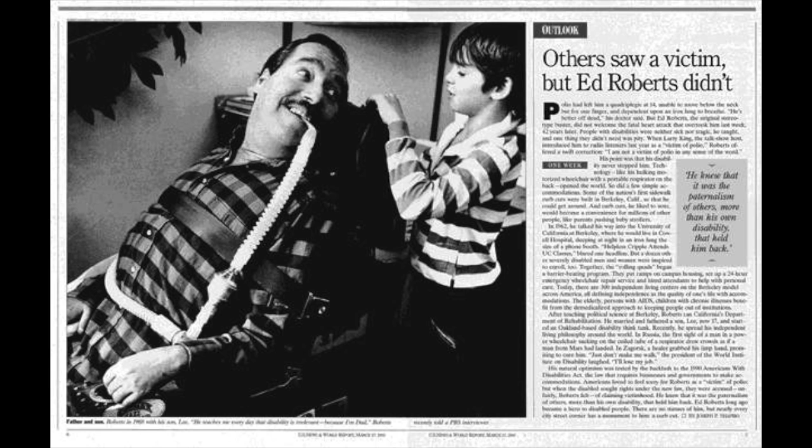It may surprise you that only 30 years ago, many of the buildings where you visit or work were completely inaccessible to people with disabilities. With a great deal of effort and commitment, people with disabilities organized and forced America to pay attention to building access. Since first signed into law in 1990, the Americans with Disabilities Act has made sweeping changes to American buildings, structures, and accessways. There are a stunning number of details in the ADA and its revisions.

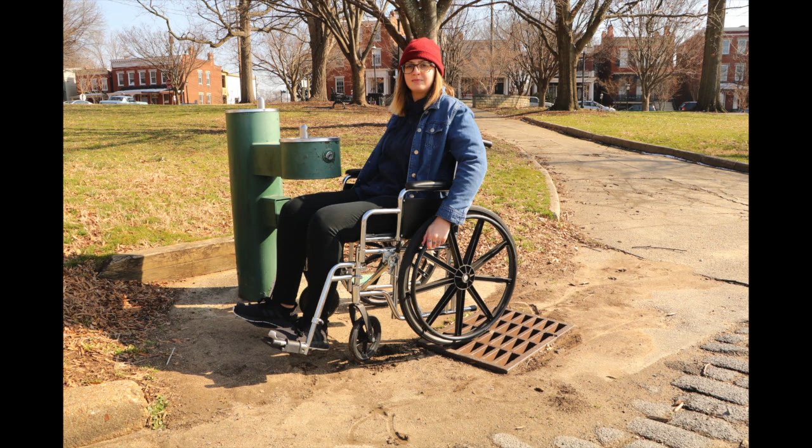Feel free to look through all of the requirements at the website www.access-board.gov. We would like to show you some of the basic parts of the ADA that you may see in your own day-to-day journey through life. Remember that the ADA is an important part of the legacy and history of people with disabilities.

There are 4 main areas called building blocks that the ADA uses as a basic guide. 1. Floor and ground surfaces. 2. Ground space or turning space. 3. Operable parts. 4. Protruding objects. In our tour of the ADA, we will address each of these building blocks.

Today, almost all government-owned or public buildings are ADA compliant, which means they are accessible to most people with mobility, vision, or hearing disabilities. Most aspects of the entrances, exits, and interiors meet guidelines that allow people to navigate. Let's start with the first area you will encounter when visiting a public building, the parking lot. There will be a specified number of parking spots and van spaces for people with disabilities. The number of those spaces depends on the total spaces allocated for that building.

For example, if there are 100 to 150 total parking spaces, the law requires allocation of 5 standard accessible spots and 1 van accessible spot for people with disabilities. The surface must be concrete or asphalt. There must also be a clear access route and signs indicating parking spots and signs to the door or entrance you will use. The surface must be hard and free of debris or deterioration.

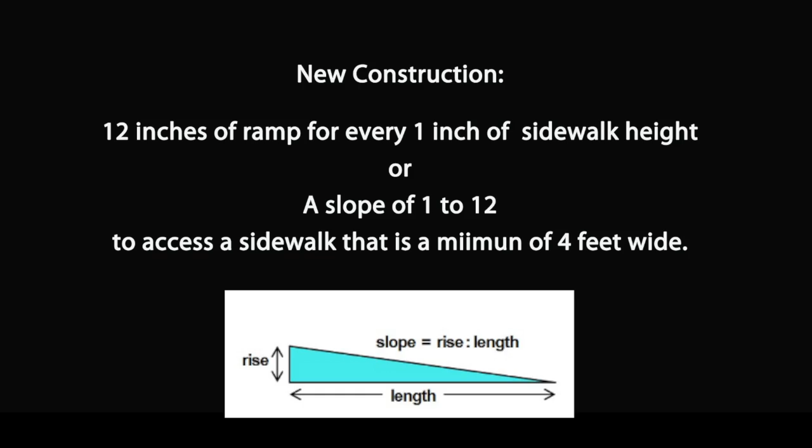Curb cuts and curb ramps that bring a person from street level to sidewalk level come in a variety of shapes and sizes. The requirement for new construction is a ramp that is 12 inches long for every 1 inch rise in sidewalk height, or a slope of 1 to 12, accessing a sidewalk that is a minimum of 4 feet wide. In your personal travels, you will undoubtedly come across curb cuts that do not meet the 1 to 12 slope requirement. These may be older buildings and sidewalks, and the curb cut is an add-on. They may be steep and difficult to negotiate.

Let's go in. At many buildings these days, access is pretty straightforward. At the main entrance, you push the blue panel and voila, the door opens. At times, you may not be using the main entrance. You might be going to a security area for clearance or to a historical building with a side entrance and a manually opening door. In an industrial or commercial setting, there must be signs indicating where you enter. There has to be a ramp to the door if it is elevated in any way. The door has to have a handle, not a knob, and the door has to open with a mere 5 pounds of force, which is very easy.

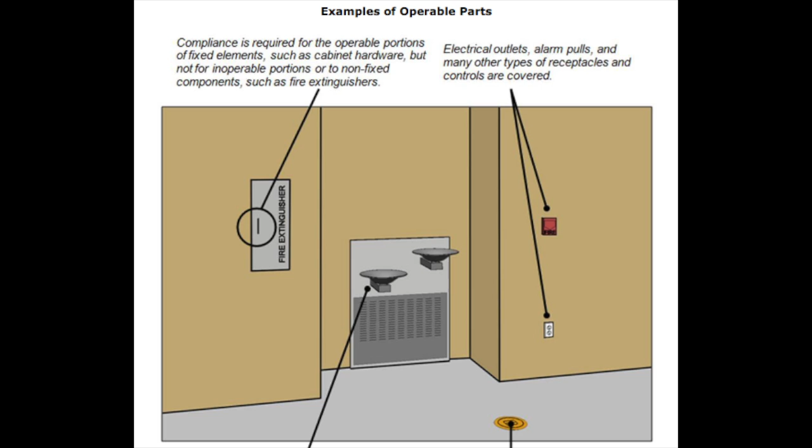The handle, instead of a knob, is one of the operable parts requirements. Other operable parts that you will see that have specific requirements under the ADA are electrical outlets, sink faucets, alarm pulls, fire extinguishers, and drinking fountains. The door handle can be no higher than 48 inches and no lower than 34 inches.

As you would expect and hope, the floor has to be hard and smooth, with plenty of room to maneuver. This maneuvering room is called turning space. Turning space is one of the critical building blocks of the ADA. It means that whenever you approach any area, there will be enough area to turn a wheelchair and maneuver effectively. The minimum dimensions for turning space are 30 inches by 48 inches. You made it inside. Good job. Here, we like to see smooth floors, plenty of light, no protruding obstacles, and plenty of room to maneuver.

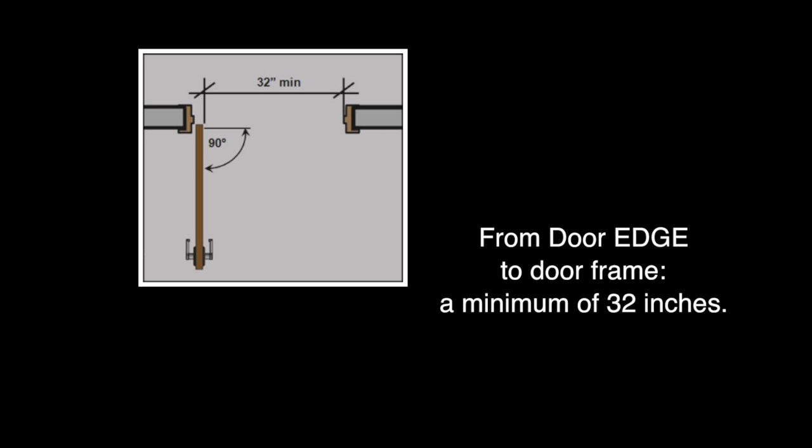Many inside doors will have the same requirements as exterior doors. There must be 32 inches from the door to the other side of the door frame. Any door that opens automatically needs to swing open outside of the clear space next to the open panel. Any door that opens to face another door must allow one door to close before opening the other door. This space is 48 inches from the end of the open door to the front of the next door. Again, this is called turning space.

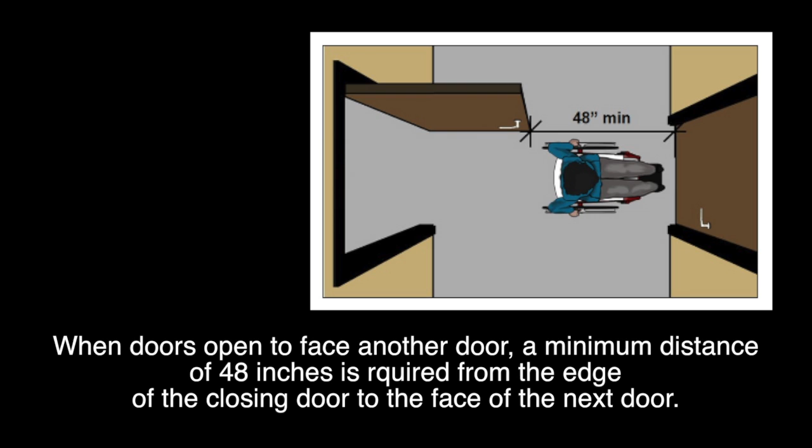Floor and ground surfaces are another building block in the ADA. Accessible floor and ground surfaces must be stable, firm, and slip resistant. Carpeting needs to be a maximum of 1/2 inch total, including the pile and backing. Any mats must have a stiff backing to avoid rolling or bunching.

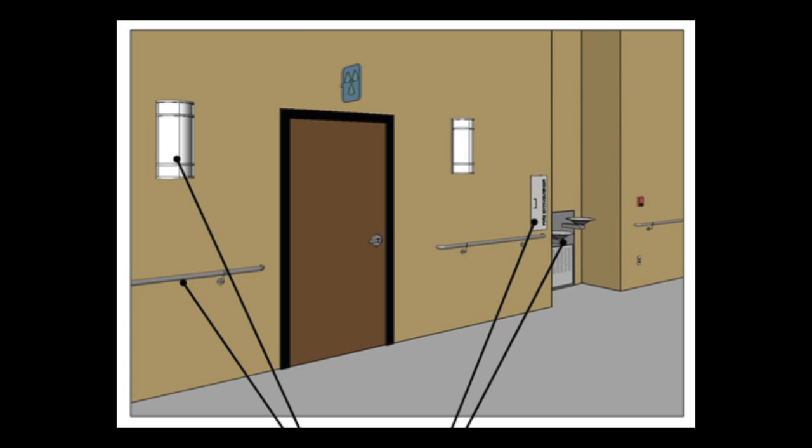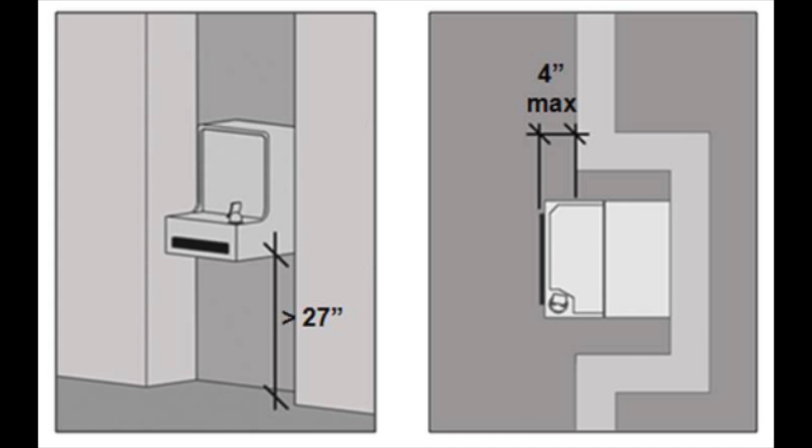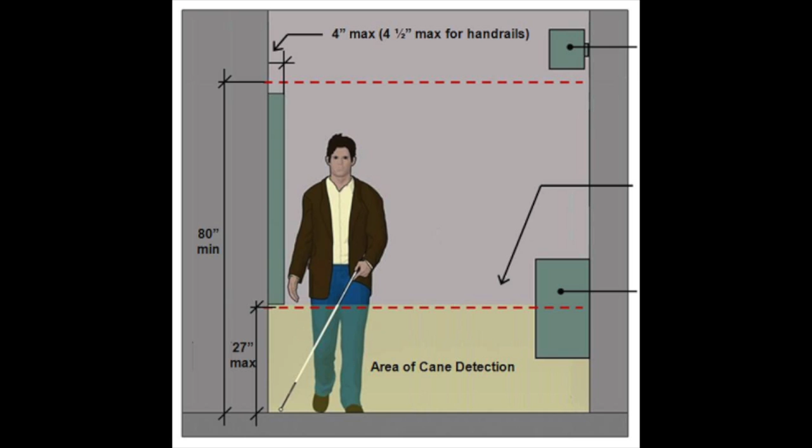Protruding objects are another building block requirement in the ADA. In a corridor, nothing but a handrail may protrude from the wall more than 4 inches. A handrail may protrude 4.5 inches. Phones, charging stations, trash receptacles, and drinking fountains need to be placed in a recessed area so they will not protrude more than 4 inches into the corridor. The lowest point of any mounted object must be a maximum 27 inches from the floor. This allows detection of the object with a cane sweep. This also allows the knees of a person in a wheelchair to fit under the object.

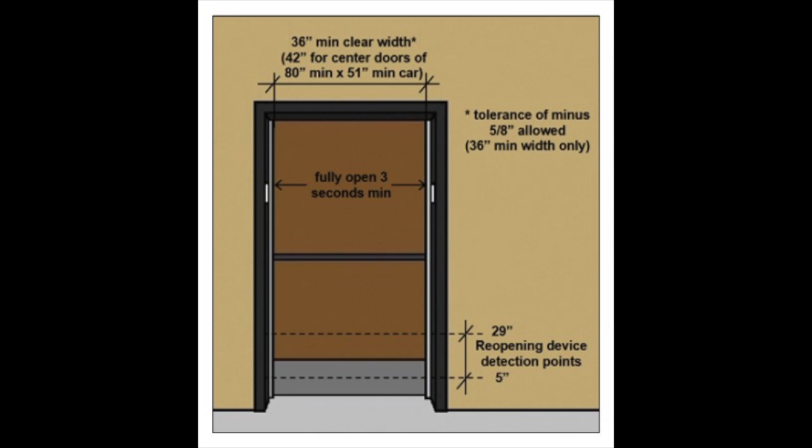If you ride the elevator, a sliding single door needs to be at least 36 inches wide. A double sliding door needs to be at least 42 inches wide. The smallest elevator allowed is 80 inches wide by 51 inches deep. That is a small space if you're in a wheelchair. Elevator doors must remain open for at least 3 seconds. The floor must comply to the same standards as hallway floors. The lighting must be at least 5-foot candles, which should be plenty of light.

All of the previous requirements apply to public restrooms. The door must be easy to open with 5 pounds of push maximum. The floor must be hard and free of obstacles and must open allowing for adequate turning space. Stall doors usually open outward, but are allowed to open inward and intrude on the turning space as long as there is enough space to maneuver. Sinks need to be wheelchair accessible.

There is a great deal of history behind people with disabilities. As you travel through your area, going to work, visiting a friend, or going on vacation, remember that many people had to advocate strenuously to change the laws and gain accessibility to buildings, transportation areas, and voting areas. Now it is your turn. Work with your neighbors and your community. Look for issues and problems and then help find ways to make the situation better. It is your responsibility, your legacy, and your future.